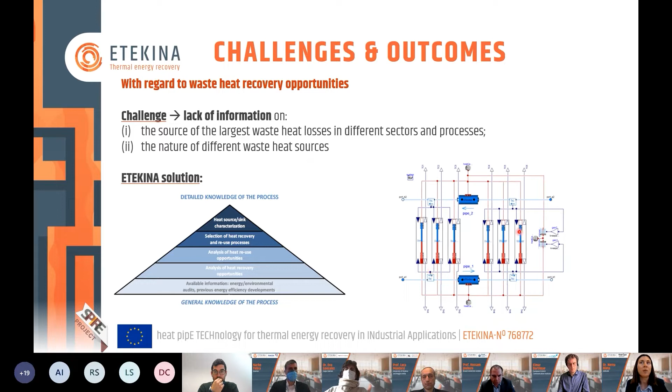Although you can also only see here some black boxes for the furnaces and for the heat pipe-based heat exchanger, there are also specific models behind each of them. So you can see here, for example, the model corresponding to the heat pipe heat exchanger, which was previously designed by Brunel and Econotherm for Fagor Ederlan.

Another challenge related to waste heat recovery opportunities is the lack of demonstration projects. Although technologies for waste heat recovery exist, their operation still needs to be demonstrated in different industrial sectors in order to ensure their wide deployment.

So in ETEKINA, we have demonstrated the feasibility of heat pipe-based heat exchangers for 3 different industrial sectors. And in addition, we have developed a tool for the analysis of the replicability of this technology in other industrial sectors. The tool provides a first approach of the potential savings that could be achieved using heat recovery technologies based on heat pipe heat exchangers at different sectors.

However, it's worth mentioning that in case the results were positive, a posterior detailed engineering design would always be needed before going through the real implementation.

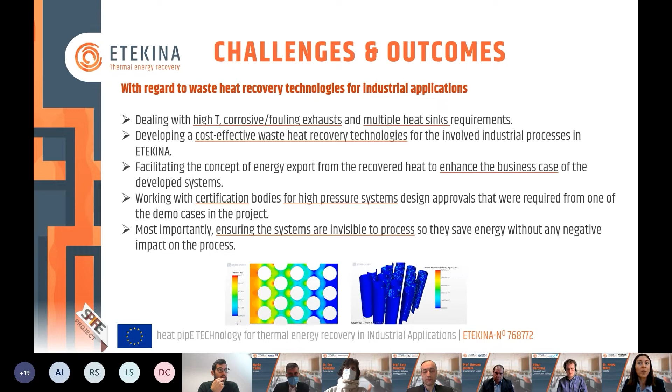Brunel University also developed a methodology for using the waste heat recovery system based on the industry type and the required heat sinks. So to sum up this part, an integrated approach to process innovation has been proposed within the ETEKINA project covering design, simulation, operating conditions, and process management, together with a breakthrough technology for waste heat recovery.

And now I give the floor to Professor Hussam Jouhara.

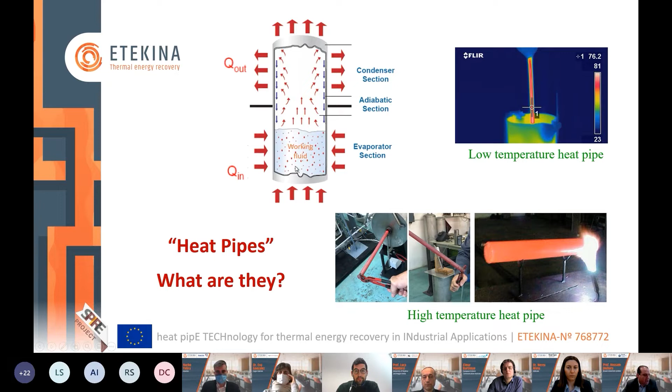What you see here is a sodium heat pipe that can go above 1000 degrees. It all depends on the application and the temperature, and then once that's determined, based on the thermal design, we get the final design approved and manufactured.

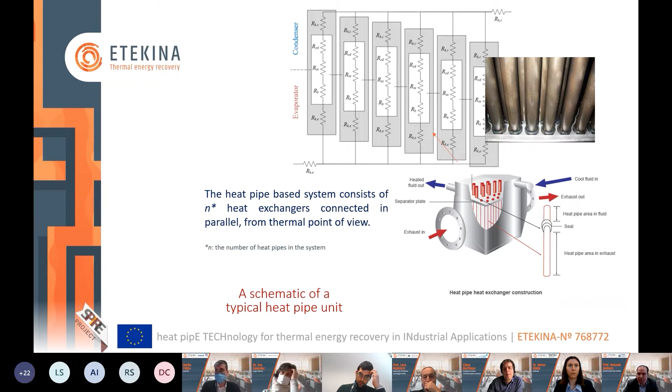From a thermal point of view, the heat pipe heat exchanger, as in this illustration, is a number of heat exchangers linked thermally in parallel. Each heat pipe is a heat exchanger in its own right, linked with the adjacent ones through a parallel link, taking the Ohm's law analogy. This is how the thermal design is developed, and in real life, this is what you see. The configuration here is really based on the thermal design itself.

Each one of us will have at least one heat pipe. If you happen to break your laptop or take it apart, you should see at least one. These are copper heat pipes. They have a wick inside because with laptops they move sometimes against gravity, but it's a heat pipe nevertheless. It transfers heat in a passive manner from the heat source, in this case the CPU or the graphics card, to where space is available so you can absorb the heat.

There are so many advantages of heat pipe technology, hence its application in ETEKINA. Multiple redundancies, as I said before, each heat pipe is a heat exchanger in its own right. So if a number of these heat pipes go out of action for any reason, the remaining heat exchangers will continue operating until the next maintenance cycle. We can also manage the fouling. In ETEKINA, we use CFD to help us in the design, ensuring the particles in the exhaust are suspended as the exhaust goes through the heat exchanger, so we don't clog the system.

For that, we also allowed ease of cleaning in case fouling builds up, so that is something integrated in the design itself. And like you saw before, there are no cold spots in the hot region, which means we don't have cold spots that corrosive elements will condense on, which is a common issue in conventional heat exchangers.

Like I said before, when I showed the sodium heat pipes, based on the design and environment, we designed the system to have compatible materials so they don't interact or get corroded as we proceed with the actual application. The heat pipe itself can have water as a working fluid while receiving heat from exhaust above 1000 degrees.

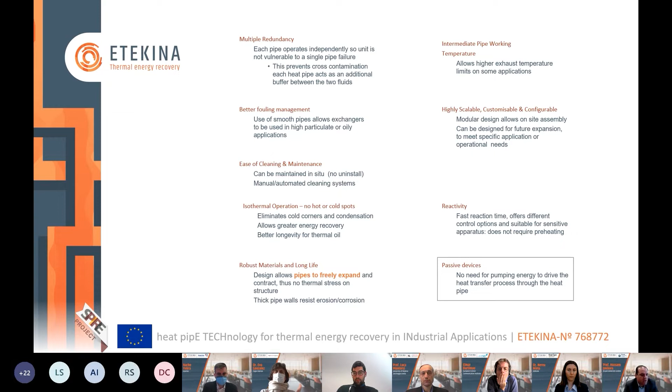We don't need to force a fluid through the heat pipe to transfer heat from the hot source to the cold source. Like you saw in the illustration before, the whole process is done in a passive manner, which gives the heat pipe technology an edge in certain industries.

In the ETEKINA project, what you see here is really an example of a development we have done where we take the case from A to Z. This is an example of an integration where we do everything in a virtual manner before we do the actual installation.

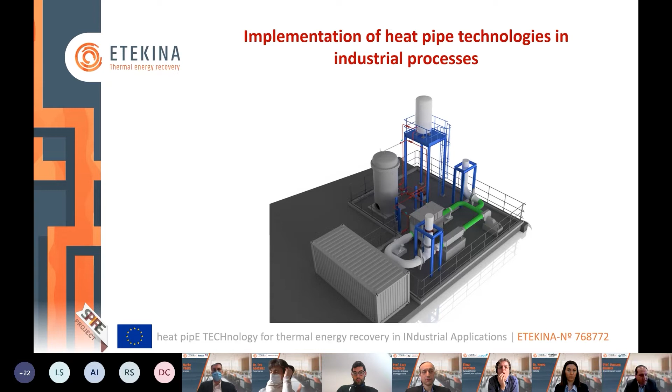The process we followed in ETEKINA started with identification of the actual potential heat recovery in the process. We've done that as a consortium. Once that is done, we define the technical specifications for the implementation. We've gone through energy auditing, installing sensors, and collecting crucial data.

Once that is done, we included everything in something called a data capture form, which included, in addition to the thermal data, the characteristics of the heat sinks and the characteristics of the heat source from a full chemical composition point of view. Once all of that is done, the heat pipe theoretical and mechanical design was conducted.

This was done in close collaboration between Brunel University and Econotherm UK Limited, which manufactured these systems. In parallel, we worked with the demo cases and the RTDs to develop and finalize the P&ID, the piping and instrumentation diagram.

This is a crucial element for any design as it puts together everything required for the demonstration. Once that is done, we know what the installation looks like, and we transform the P&ID into an actual 3D installation. The 3D installation should look 100% the same as that in real life once approved.

So once the demo case is happy with it from a dimensions, locations, and instrumentation point of view, the implementation and commissioning is concluded. The commissioning for all the ETEKINA units was conducted under the supervision of Econotherm and Brunel to ensure the design data was achieved.

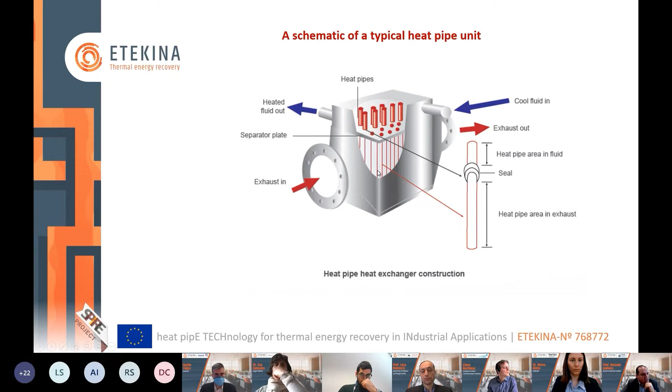Just to give you an idea about the partners who have allowed the demonstration, also partners in the ETEKINA project, without going too much into details since that is coming later: we have three industries in our consortium. The aluminium industry demonstrated in Fagor Ederlan, in very close collaboration with Insertec with regards to oven operation. The concept there is to recover heat to heat air that will be used in the furnace.

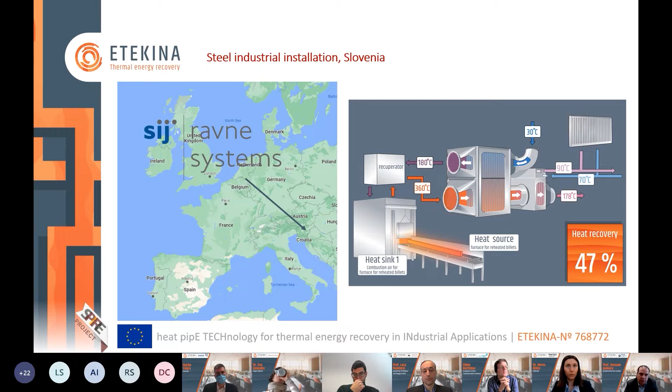The second industry is the steel industry in Slovenia. Our partners there are Ravne, with very close support from the Jozef Stefan Institute. The target there was to do two things: one, to recover the heat for a typical application, gas combustion preheating. In addition, they have potential for energy export to a local district heating network. So the challenge there was really the energy balance between the energy going to preheating the air and that exported beyond the plant itself, and how that balance is done through a very robust control system.

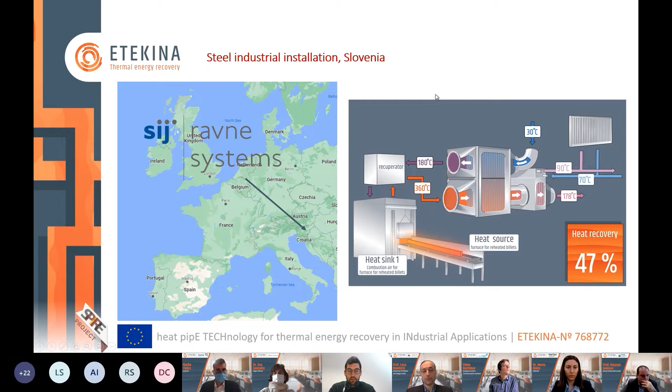So, energy reuse and energy export, quite a challenging design actually, because the temperature of the exhaust can vary sometimes 200 degrees up and down. So that was a very big challenge. We had to work very closely with the partners on the design of the system, and pleased to say that we managed it with various complications that were made possible thanks to the collaboration of the partners in Slovenia. You can see here the air preheater section and the exhaust leaving, going into the water section where the energy is exported.

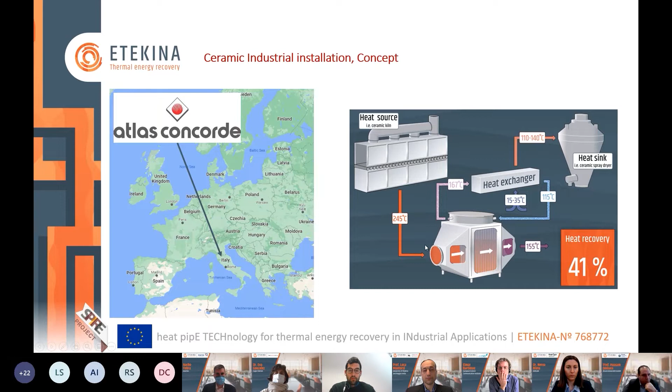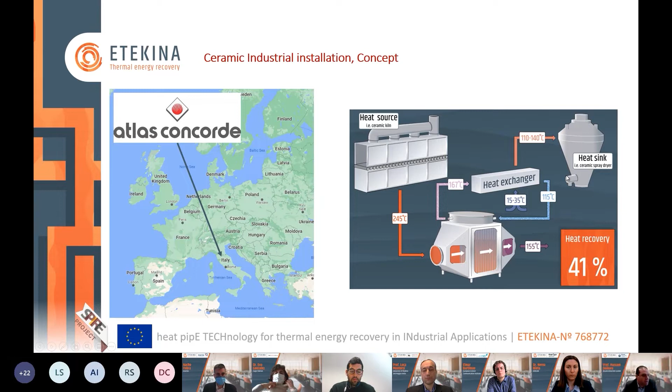The last installation was in the ceramic industry. We've been successful in the ceramic industry before, but this one here has certain challenges, at Atlas Concorde. The challenge here is the high temperature for the water, coupled with quite challenging exhaust conditions that we had to deal with, and large units - we're talking about 700 kilowatt units, and my colleague from Atlas Concorde will expand on that later. The minimum target for our recovery was 41%, and I'm glad to say that we have achieved that nicely. This is the scale of the system during commissioning, and I thank every partner involved in these demo cases on behalf of the consortium. It's been a real pleasure working with all of you on these successful demonstrations, and thank you.

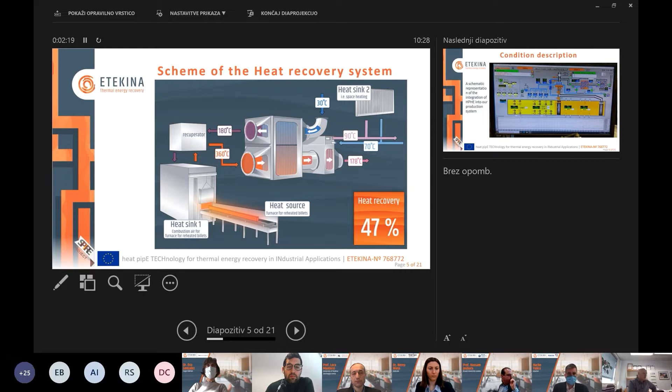Here we can see how we integrated our heat pipe heat exchanger into our production system. This system working in the bypass, and in this solution we can anytime switch off the system without any impact to our furnace.

Our heat pipe heat exchanger has been in operation since the end of October, with stops due to maintenance, testing, and plant production stops. In this period, we produced more than 1,000 megawatt hours, around 60% combustion air and around 40% hot water.

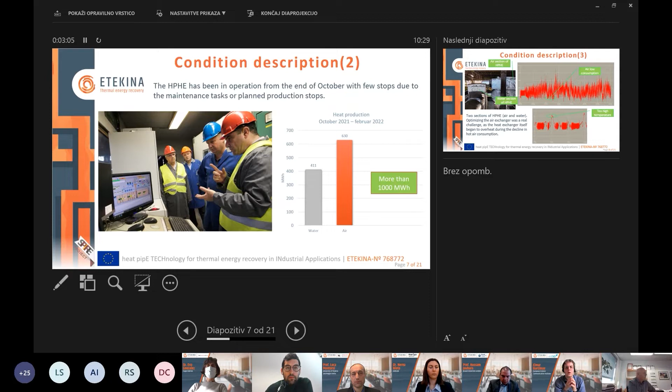Before I talk about the two sections of the heat pipe heat exchanger, we used air and water. We had a very high challenge to optimize the air exchanger, because in a situation with low consumption of combustion air, the temperature in the heat exchanger goes up, and then we have a problem working with our system.

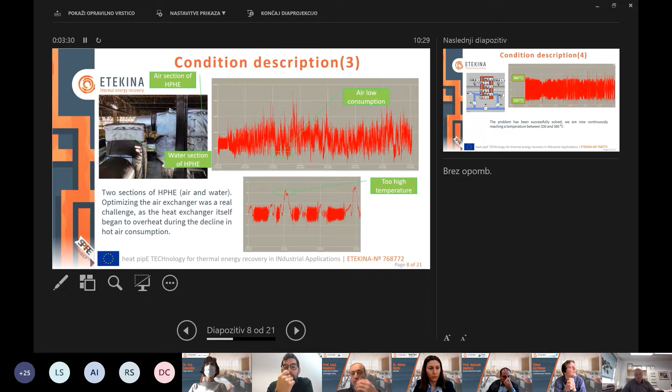This way we made a good solution. We included one flap for mixing the air, and now we continuously reach a temperature between 330 to 360 degrees.

What can it be... Hello, do you hear me? Yes, now. Oh, thank you.

Okay, hello, I am Fouad Al-Mansouri, coming from Jožef Stefan Institute in Slovenia. Now I will present the results of the operation of the heat pipe heat exchanger. I will take the characteristics for one normal working day, from the 6th of January 2022.

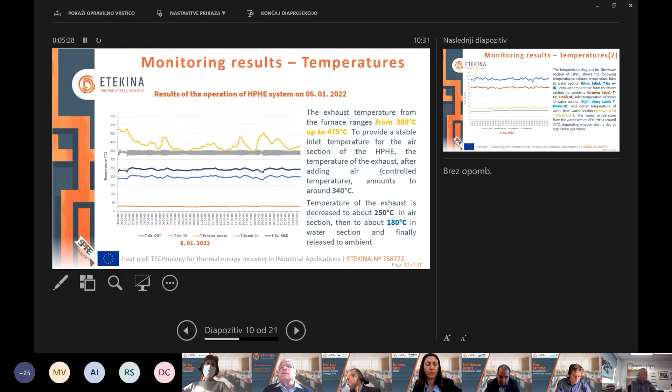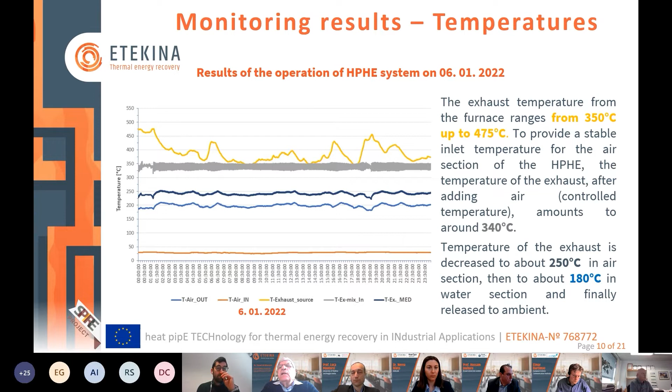Can you see that in the gray line, at about 340 degrees in the diagram? On the other side, the exhaust temperature decreases to about 250 degrees in the air section of the heat pipe exchanger, and also to about 180 degrees in the water section, and finally is released to the ambient.

But this project - now this diagram, can we see the diagram of flow rate of the exhaust? Exhaust from the furnaces, that's in the lower part of the diagram, the gray line, can you see?

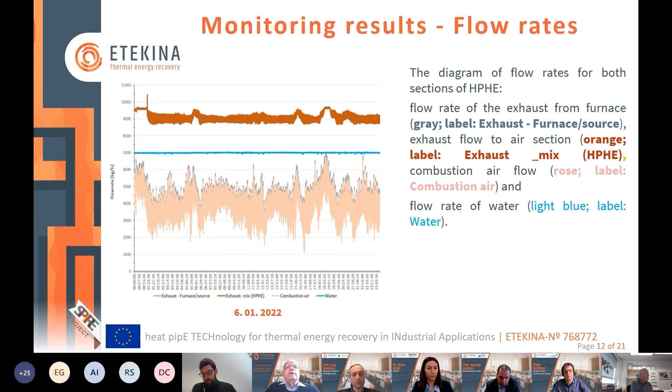Here we have the temperature and corresponding heat recovery power from the water section of the heat pipe exchanger. The units scaled on the diagram below are also aligned in degrees Celsius and kilowatts. Here we can see that the power at the top was about 130 to 137 kilowatts during a working day, and the temperature increased from more than 50 degrees to about 70 degrees when it left the condenser part of the heat pipe exchanger. Next, please.

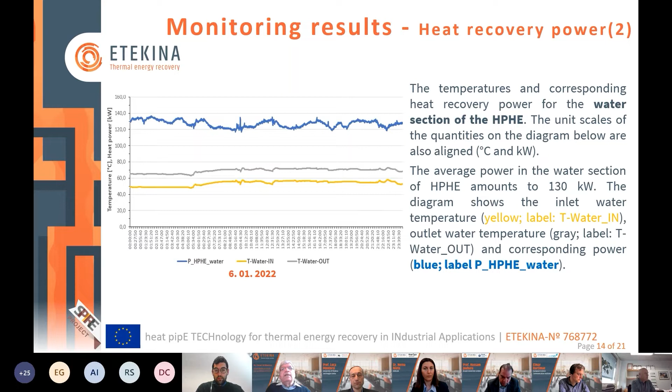Now, about the exhaust power in this reference or first primary stream, we can see in orange or dark orange in the higher diagram, and in the yellow diagram, the total power heat recovery from both sections. We achieve about 330 kilowatt in the heat pipe for both sections. In this time we have about 500 kilowatt.

This is the reference from the furnace exhaust, the power of exhaust potential. The efficiency was more than 60% at this time, but for the whole year it's more than 50%. Between working both sections, the efficiency is higher.

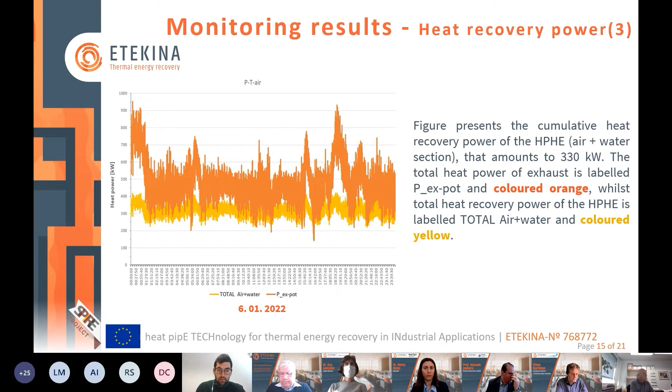Now, with the economic impact and saving, we calculated this for the period from 5 November 2021 to 30 January 2022. This amount is about more than 532 megawatt hour total in both sections, amounting to more than 30,000 euros.

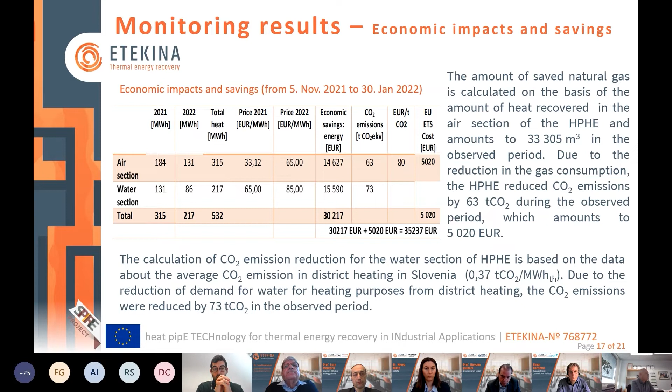Next we have a prediction of yearly heat recovery, calculated also on the average heat saving in the period when really working, previously. What can we see? We achieve more than 2,400 megawatt hour heat recovery for both sections.

This also reduces the consumption of natural gas by about 177,177 cubic meters, which is a reduction of CO2 emission by more than 330 ton CO2. The economic estimation impact here is about 200,000 euros per year. This is, I think, a very efficient economic impact of this system.

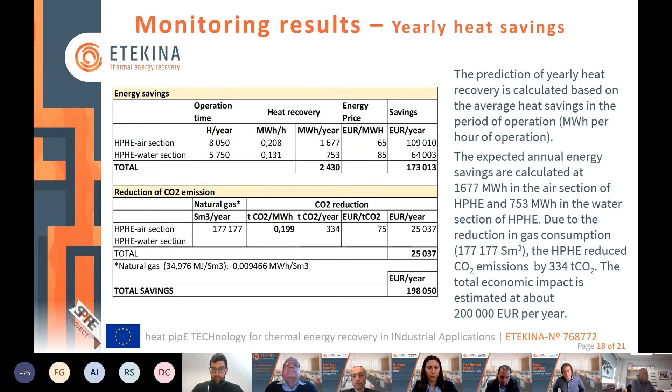The energy saving and economic impacts are even more significant than anticipated. With increasing prices of energy and emission allowances, the economic impact will be even higher.

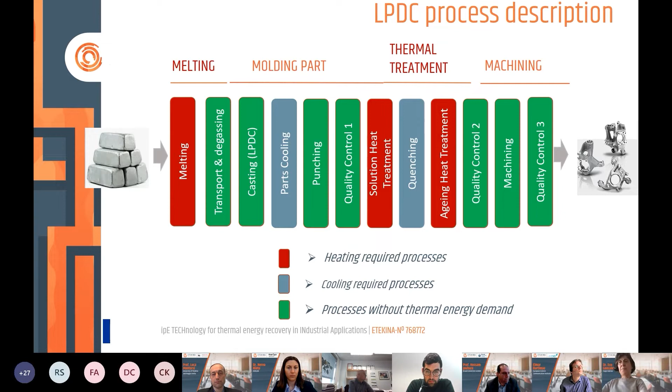So the ETEKINA heat pipe heat exchanger for Ederlan was in the thermal treatment, and the objective was to recuperate energy from the first furnace, the solubilized furnace, which is at 540 degrees centigrade, and use it for the second furnace, the ageing furnace, which is at 165 degrees centigrade.

Here, a picture of the furnace itself. This is important, the operation modes. I will do like this, if you don't mind.

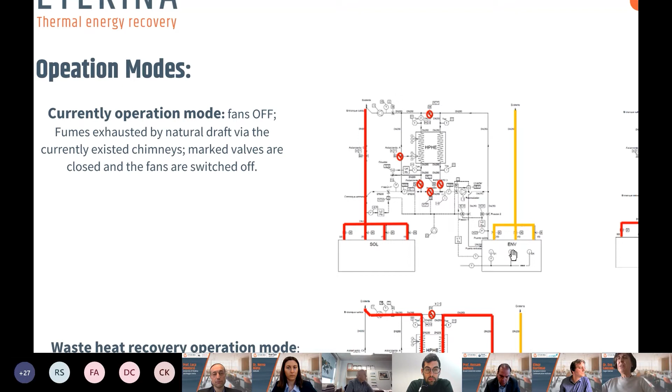This is the mode when the HPHE exchanger is not working, when there was no demo case in this project. This is the first oven with the fumes, where the energy goes out of the process. The second furnace is the same - the fumes with the heat go out.

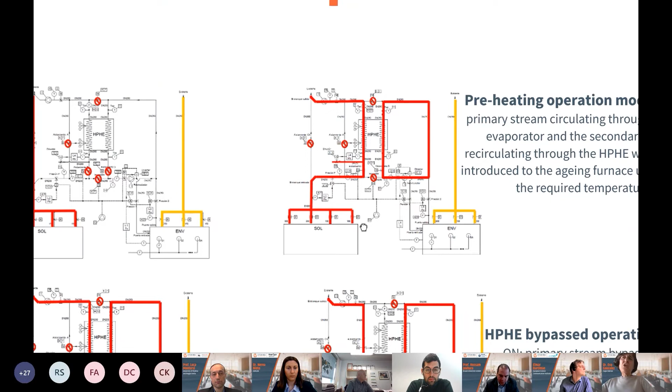This is a mode, a preheating operation, which is not very important - just to mention that there is this mode. The important mode is here.

Here is when it's recovering energy, and how it's working from the first oven. The fumes are collected and go through the HPHE exchanger that keeps this heat, so the fumes go out with another temperature. In the second oven, the fumes go to this HPHE exchanger and capture the heat left there, and go out with higher temperature and go again to the oven.

The last mode of operation is just a functional one, because when we have too much heat in this oven, it's just a bypass in order not to capture more energy for this oven. So the fumes in this case go out without passing through the HPHE exchanger.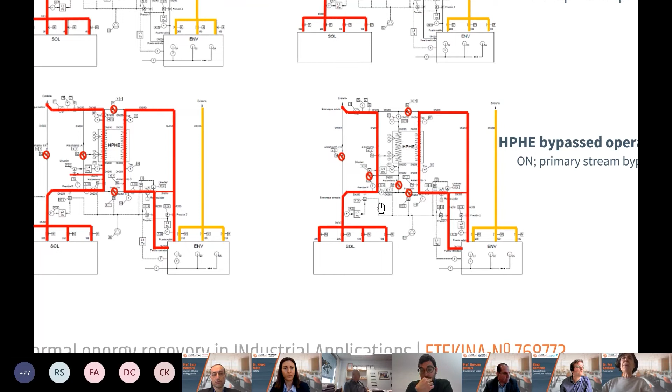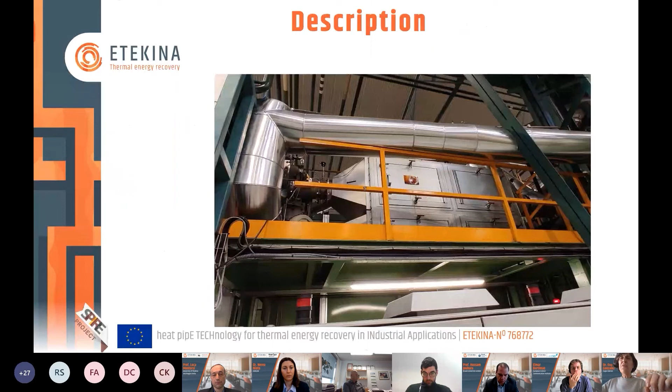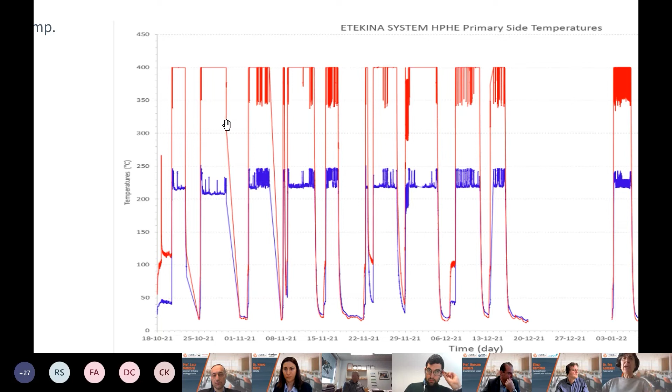We can say that the fumes for the first oven enter the HPHE exchanger at 400 degrees. We had to dilute something because it was too high - the temperature was too high for the HPHE exchanger. So the fumes enter at this temperature and go out at about 220. So this heat is already kept in the system.

If we go to the second furnace, we can see that the fumes go out at about 197 degrees centigrade, a little bit higher than we expected. When they go to the HPHE exchanger, it captures or keeps all the heat, and so the fumes go out from the HPHE exchanger at 300, and that's the fumes that enter again to the second oven.

Here, just the pipes, the water pipes and the oil pipes. Of course, the oil pipes are able to keep more temperature and more heat, and they work constantly - they worked all right during the entire monitoring period.

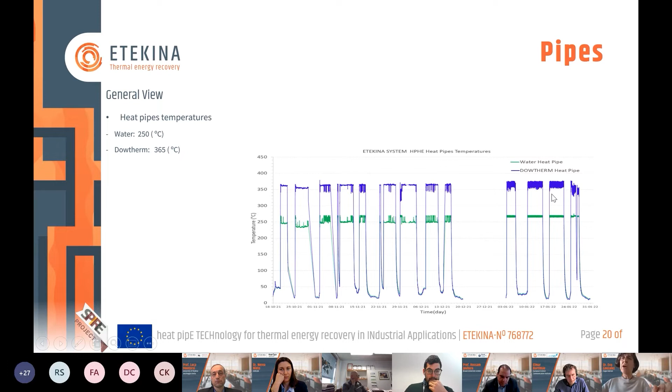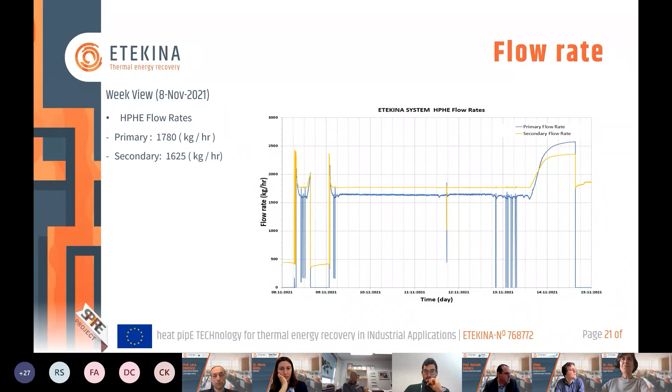The flow rates from the primary and secondary ovens work a little bit differently, but this doesn't interfere with the working of the system. From the primary stream we can say that the heat recovery power was 80 kilowatts, and it was maintained for the entire monitoring period. So the heat efficiency is about 40%, also maintained during the entire period.

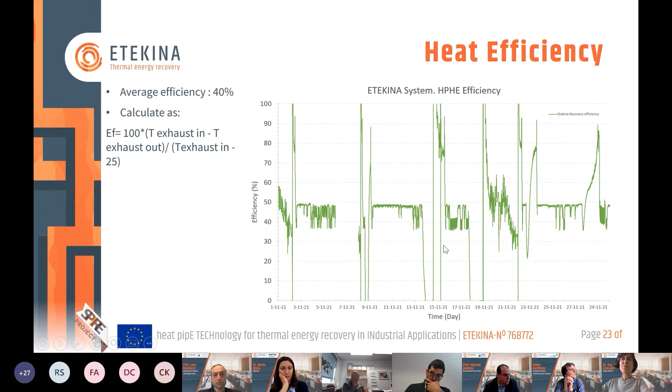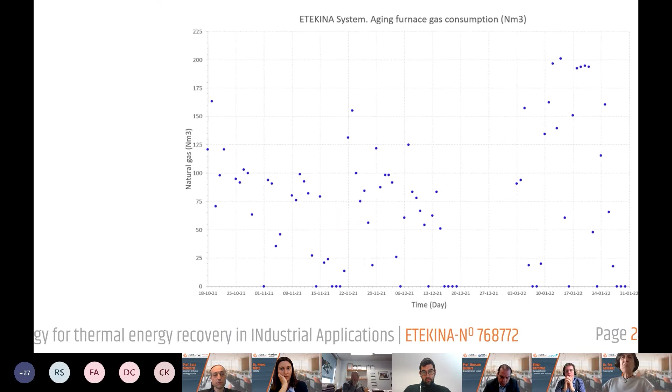Here we also measure the natural gas saved. At the beginning, we measured every day how much natural gas we were consuming. As you can see, there is a lot of variability. This is one of the problems we face because making these trials at the production site, the production is not the same every day, so gas consumption is very related to production. We can see in this period there was no HPHE exchanger, and the gas consumption is a little higher. But because of this variability, in the period when the HPHE exchanger is working, it's not very clearly seen.

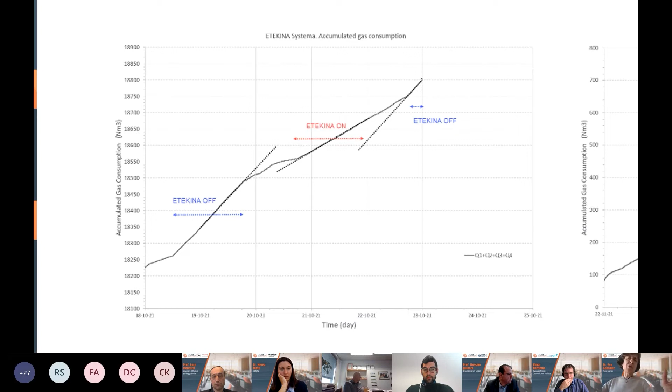So what we did was use another way to measure: the accumulated gas consumption. If you see the first period, when the ETEKINA or the demo case was off, the accumulation curve is much higher than when the ETEKINA is on. When the ETEKINA is on, we can see the curve is less, and it increases again when the ETEKINA is off again. Here in this graphic you can see the same issue: first when the ETEKINA is off, then it changes inclination when the ETEKINA is on.

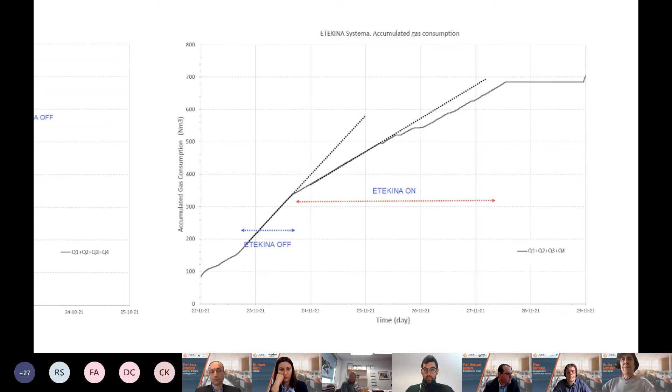And the last point is how to go from a research project to an industrial solution. We've been working on 3 different scenarios. The first is the actual demo already installed in Fagor Ederlan. The second scenario is how an industrial HPHE exchanger would be, because we've learned a lot, but there was something we didn't know at the beginning and wanted to be sure about: we were very worried about not influencing the production or mechanical characteristics of the part. So there were some mistakes in orders — the diverter valve, the fans were a little bit bigger than needed.

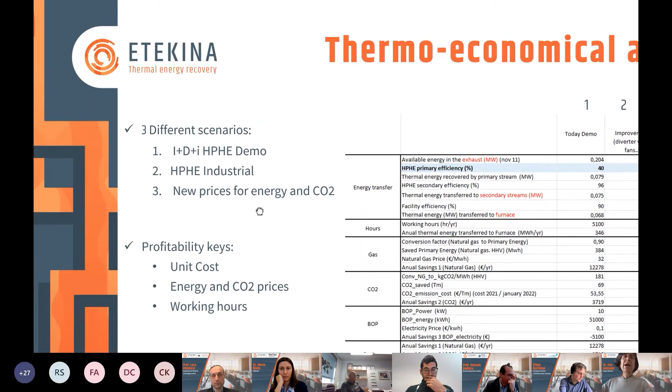And the third scenario is the second scenario plus the energy and CO2 prices of 2022, because from the beginning of the project, or even from last year, the energy prices and CO2 emissions costs are very different. So in this table we can see scenario 1, 2, and 3. Here we have calculated the energy transfer, the hours working, the gas consumed, the CO2, the power needed, the savings, and the return of investment.

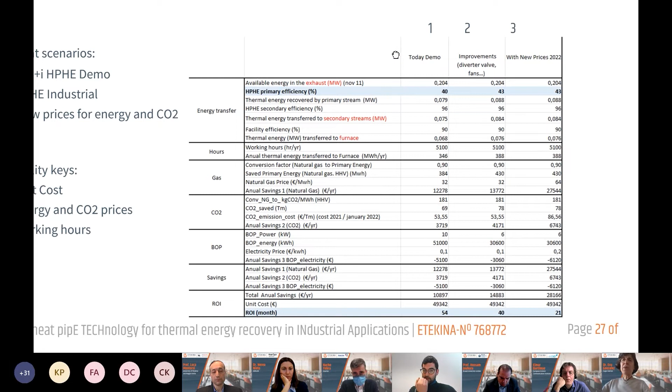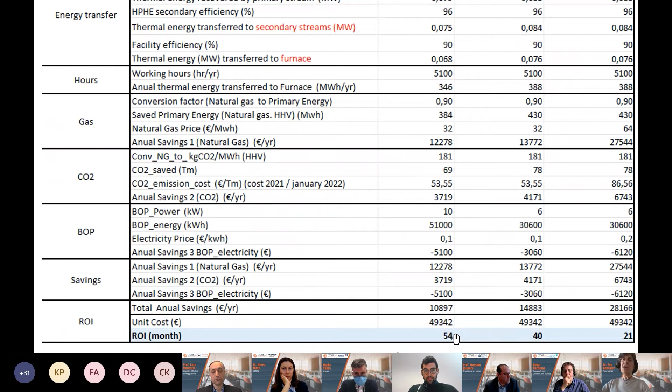In the first scenario today, we have these annual savings, and the return of investment is 54 months. But as we said, if we make an industrial one with all the connections and the system changes a bit, we are sure we can get to 40 — the annual savings will be higher and the return of investment will be less, about 40 months. If we apply the prices in the third case, the actual energy and CO2 emission prices, we see that the return of investment is much lower, below 2 years.

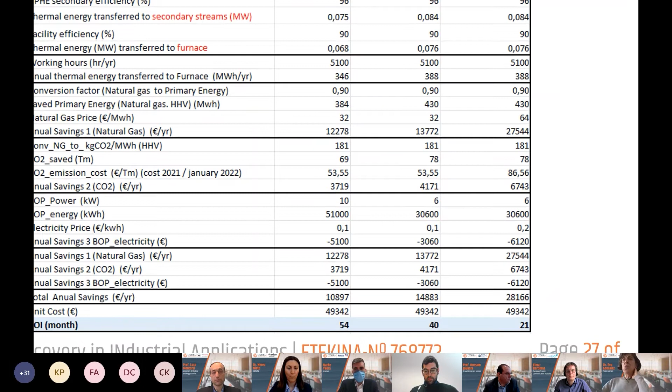This is important because, as I said at the beginning, it was not easy to find an investment for energy savings with a return of investment of less than 2 years. Even 3 years was not easy to find.

And this is all I have to say. Thank you very much. You have my contact email, and also Insertec's, in case you need it, if you have any questions.

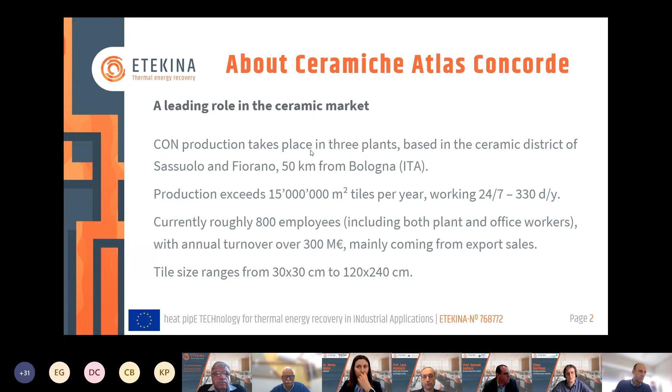Especially when it comes to raw materials and energy. Our tile size ranges from traditional small tiles, 30 by 30, up to over 2 meters long tiles with huge slabs.

Of the 3 plants, we decided to focus this project on the Fiorano plant, which is the main plant in ceramic Atlas Concorde among the 3. In it, we have 2 spray dryers, 7 dryers, 5 kilns, a natural gas cogeneration via an engine of 7 megawatt of electric power output, almost entirely consumed inside the plant. We have more than 250 workers, and production is over 10 million square meters of tiles per year produced nowadays.

What is our role in ETEKINA? Of course, we have the role of demonstrating the benefit of having such a system installed in our place. We were involved in work package 2, the process analysis. We took care of sampling the flows, the temperatures, and so on.

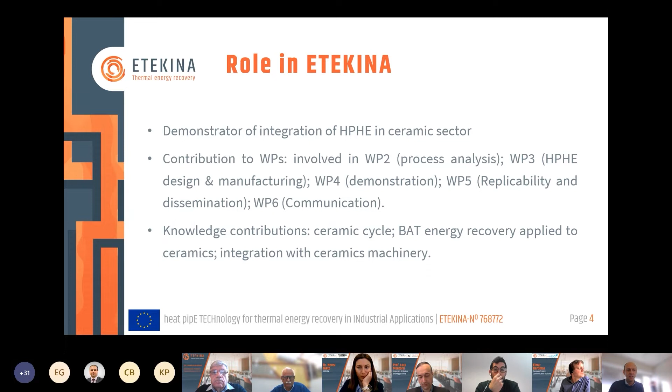Which was our key role? Our key role is about knowledge of the ceramic cycle, and which are the best available technologies applied to ceramics. Also our role is to know how to properly integrate innovative contribution, innovative ideas to the ceramic plant and the ceramic machinery.

So we receive the raw materials, we carry on grinding them in a rotating mill. We get the slip, which is a fluid, a mixture of water and clay, and then we spray dry them and obtain the powder. Then we go on pressing this powder into the shape of the tile, which has to first be dried, taken to almost 0% humidity. Then it has to be decorated and glazed, and then comes the firing section, when the tile itself is cooked and becomes hard.

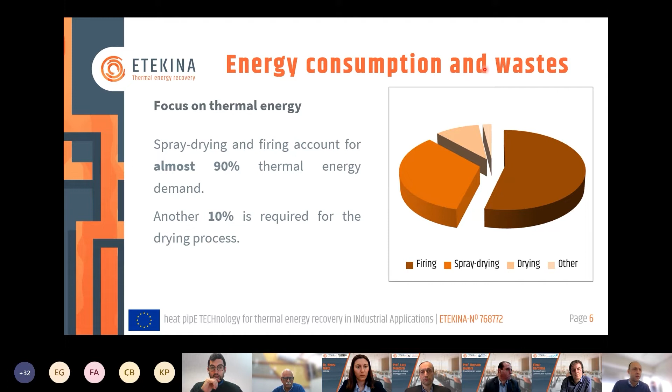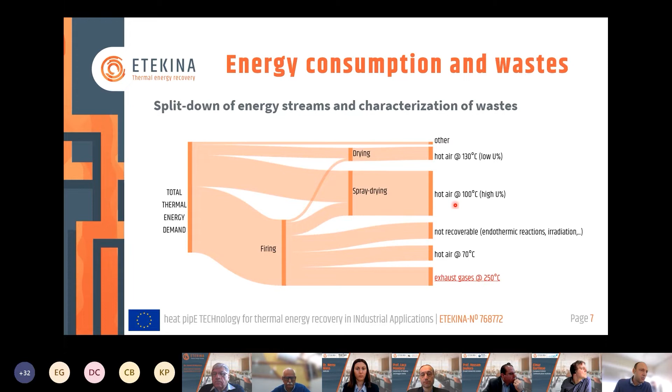So we take the heat from the stream, the exhaust gases of two ceramic kilns. We carry it to the heat exchanger, the heat pipe heat exchanger. On the evaporator side, we've got the exhaust of the kiln. Then we go to the filter. On the secondary side, we've got a closed loop of superheated water, which provides the heat to a fin coil heat exchanger, which itself warms up air to be fed to the spray dryer.

The spray dryer is the machinery, you remember, at the beginning of our process, which dries up the slip, and which works at 500, 600 degrees. So it's a relevant saving for the spray dryer to receive the same air, not at 15 or 30 degrees in summer conditions, but at 120, 140 degrees.

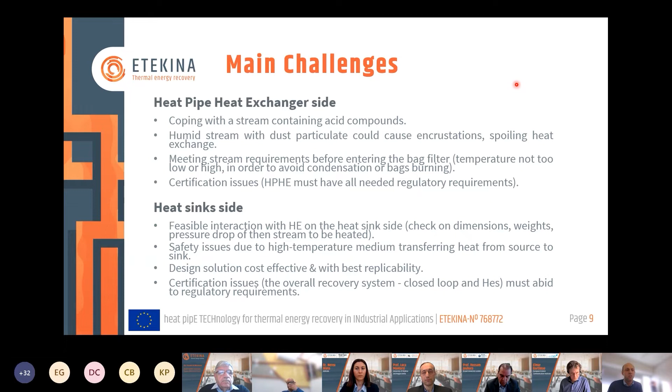During the first year of the project, we mainly focused on identifying the correct, most suitable heat source among the kilns in the plant and the most suitable heat sink. In the second year, we focused on design of the system and the suitable heat medium, which at last was identified as water. In the third and fourth year, the executive phase of the project took place — we started with integration and then the demonstration, which is going on right now.

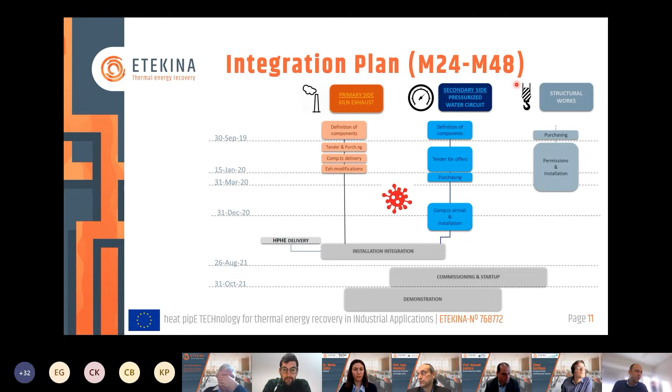Of course, we have some expectation on this project now that it's working. And the main one comes from containing energy bill, especially due to the fact that nowadays energy market figures are really terrible, both for natural gas and for CO2, which are the two main savings that we are going to obtain via ETEKINA.

We expect to recover 41% of kiln exhaust sensible heat and reach almost 4,000 megawatt hour of natural gas savings, and over 800 tons of CO2, and consequently, a relevant natural gas consumption reduction on the spray dryer.

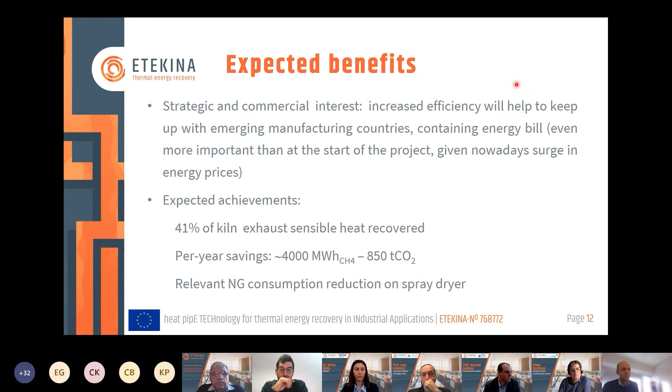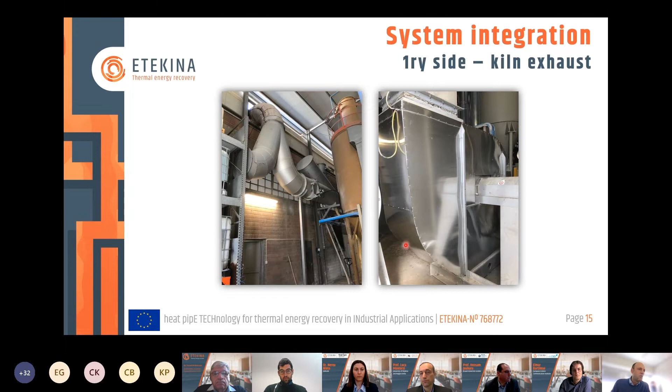We had to operate on the kiln piping. The original piping, which was going straightly to the filter, had to be modified in order to accommodate the bypass, which goes to the heat exchanger, positioned here, and then goes back to the original piping. We had to modify the fan to install the superheated water pipeline running both on the outside and on the inside of the plant.

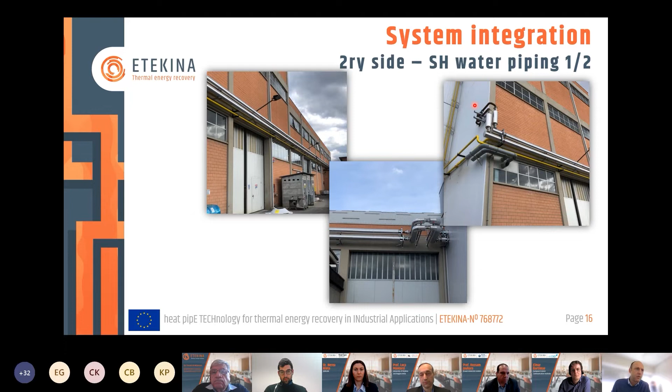Here you see a detail of an expansion omega with expansion joints, more expansion joints in another curve of the piping, here inside the factory, a curve to the heat sink.

Here you see a portion of the spray dryer, which is very tall, almost 20 meters tall. And here you've got the air intake, which is going to be preheated via this fin coil heat exchanger. Here you see the piping, the superheated water piping going in and out of the heat exchanger.

As for electric system and control panel, we had to provide also all the controls and logic to control temperatures, the bypass of the system, and the three-way valve in order to properly operate the water loop.

As for the marking of the unit, a lot of documents had to be provided. The unit had to undergo a lot of approvals and certificates in order to meet all the requirements we needed here in Italy. It had to be approved by Lloyds, a third party who took care of approving the unit as a PED category 4. It also had a CE marking and the declaration going with it. Then there were other documents to be provided on the Italian side, which we took care of.

A brief representation of temperatures and power over one week of operation. Here you can see the temperature of the streams, just seeing the moments when the spray dryer was working. The temperature in this week would vary from 250 degrees at the inlet of the unit to 280 degrees, and the bypass valve was almost always shut down, same as the three-way valve.

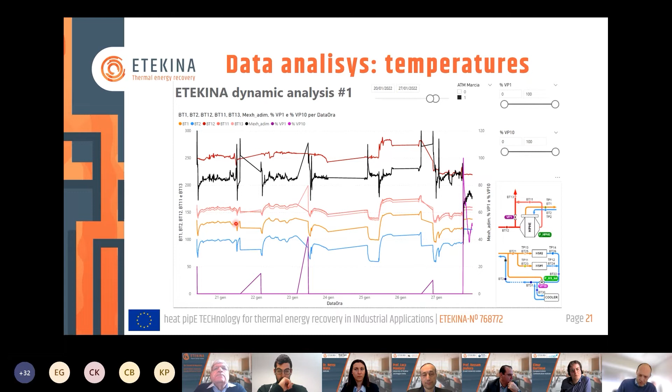As a consequence, we reached a power recovered of almost varying from 600 to 700 kilowatts. And this was what we expected the unit to deliver, also in terms of energy saving.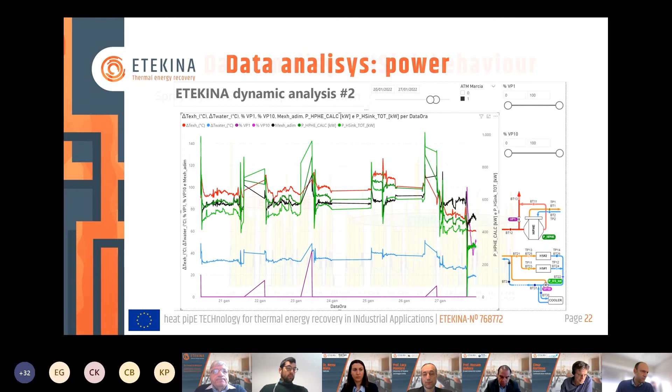You can see the proof here on the spray dryer consumption. Here you can see the first days of January, when the system was shut down because the kilns were not operating. And then the same spray dryer when the system was operating. So you see the shift in energy consumption.

As a conclusion, we could say that yes, the system design and the knowledge of normative, regulatory and asset issues allowed us to realize an innovative heat recovery. Innovative because it comes from a heat source which is usually discarded to atmosphere, at least here in Italy. We consider it an important energy stream and an important solution.

The natural gas saving is one-to-one with the power measured in the unit. So for 1 kilowatt that we are saving, measured on the water side, we are saving 1 kilowatt of natural gas in the spray dryer.

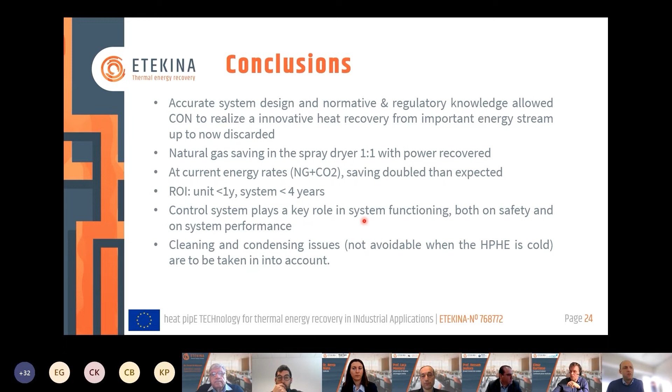And last, when dealing with the stream from the kilns and with this kind of stream, the condensing issues and the cleaning issues are to be taken into account. The condensing issues are not avoidable when the unit is cold at the beginning, so it is something that has to be taken care of when designing the unit with the proper materials, how Brunel and Concorde did.

That's all from my side.

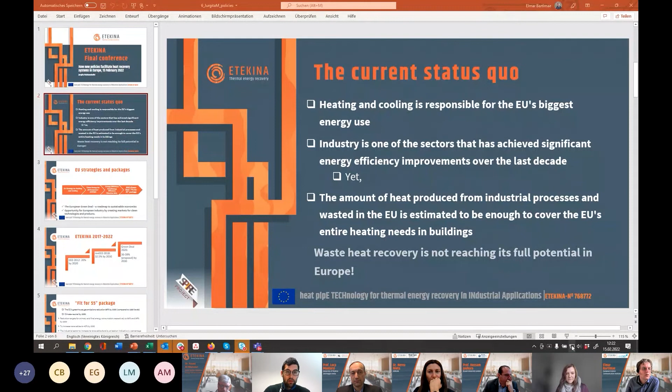Let's talk about EU strategies and packages. The first one is the EU strategy on heating and cooling. In 2016, the Commission launched this strategy, nearly 6 years ago, as it was launched on 16th of February 2016. The Commission looked at plans to boost the energy efficiency of buildings, improve linkage between electricity systems and district heating systems, and also increase the use of renewable energy and encourage reuse of waste heat generated by industry.

That was the very first time the Commission looked properly at the European level, because before that, all the heating and cooling was more to do with national policies. So national member states had it in their own policies to do something at this point.

Now moving to the legislative point of view. Strategies are good, they drive and show the future, but we need more measures, more compulsory measures from the member states. So what the Commission published is the so-called Clean Energy for All Europeans package. In this package we looked at the directives, we revised the directives, and the Energy Efficiency Directive is the most relevant for our project, so we looked at it most.

Thank you. Next slide, I think it just says thank you and my email. I added a few publications as well, more from the regulatory side, more from national policies in Slovenia, Spain, the UK and Italy. Thank you.

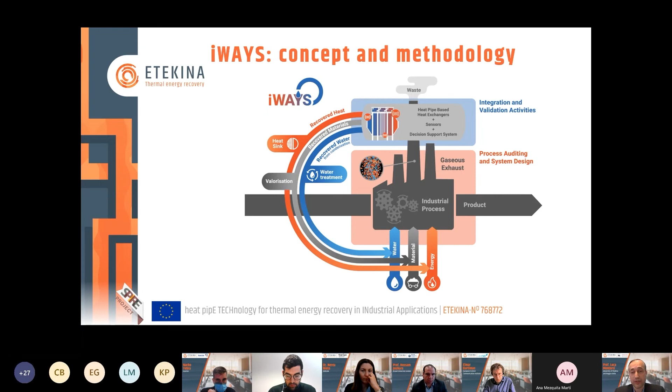So what's new in this approach? Indeed, there are a lot of new technologies, because the heat pipe heat exchanger has to face a corrosive environment, so it must stand corrosive acids or other substances that might be present in the exhaust gases.

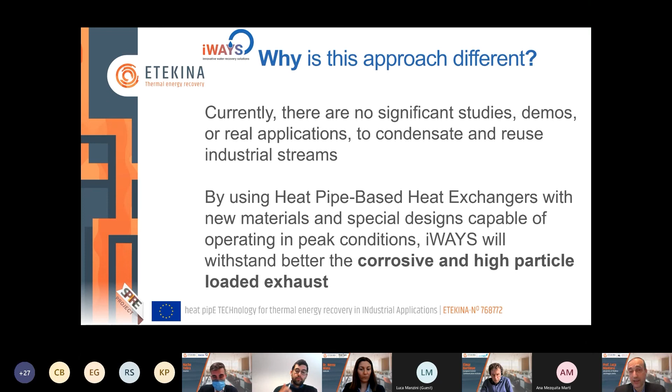Also, particulate load will be an issue, and we need to recover both water and material and use them back in the industrial process we are addressing. Or, in some cases, if what we are recovering is indeed a product for this industry, it will be a commodity that can be sold by the industry itself.

These are the numbers of iWAYS. We are 19 partners from 9 countries. We have 3 demo cases, 4 technology providers, and the project will last 48 months. Indeed, 1 year already went through, so we are in the second year of this project.

These are the partners of the consortium. I'm sure that you can recognize some of them. Some of them are also in the ETEKINA project.

These are the specific objectives of the iWAYS project. Just to mention a few figures, we are aiming at reducing by 30% the freshwater consumption of the industrial process we are addressing. We are going to recover 20% of the heat from the exhaust stream for that industrial process, and the payback period is also an important topic for iWAYS, as well as for ETEKINA, and we are aiming at a payback period lower than 5 years.

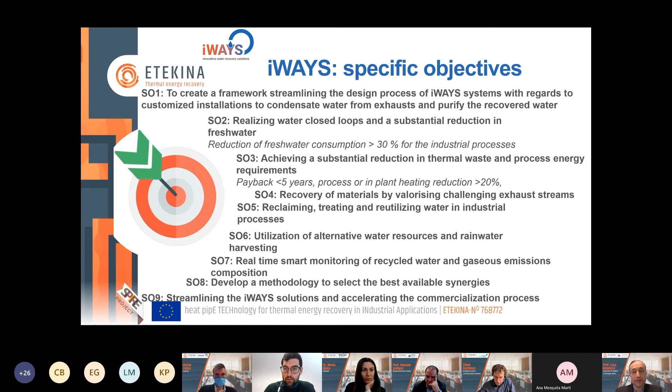Indeed, we have also other specific objectives, because we are going to implement a monitoring system in order to increase the control and monitoring capabilities of the industrial process. And we are also going to develop the DSS tool for the evaluation of possible alternatives to fresh water for the industrial process.

These are the technology components for the iWAYS project. We know very well the heat pipe based heat exchanger, but as I said, we are aiming at condensing the water content of the gaseous stream, so it will be a heat pipe condensing economizer, because we are indeed condensing water and eventually other substances in the gaseous streams.

We are going to develop a decision support system based on sensors and control systems that will be implemented in the demo cases. And water treatment will be another important topic for the iWAYS project, because the condensate will be treated and purified to the level required for the industrial process, so that we can reuse the condensate in the industrial process itself.

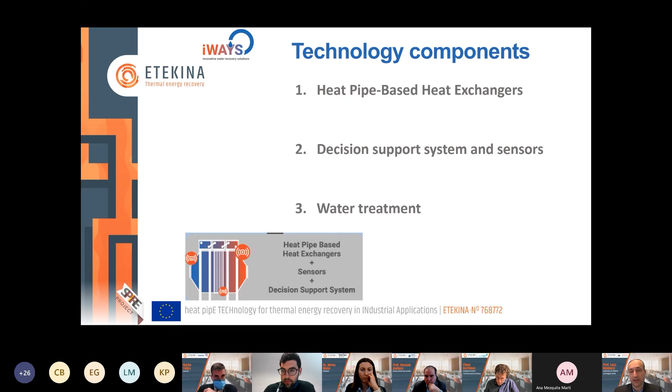A very quick description of these technologies. This is the heat pipe heat exchanger. I'm not going into the details about it, as we heard about the functioning of this technology. The step forward for the iWAYS project will be decreasing the temperature of the exhaust gases below the dew point of the water content, but eventually also of sulfuric acids or other acids that might be in the exhaust stream.

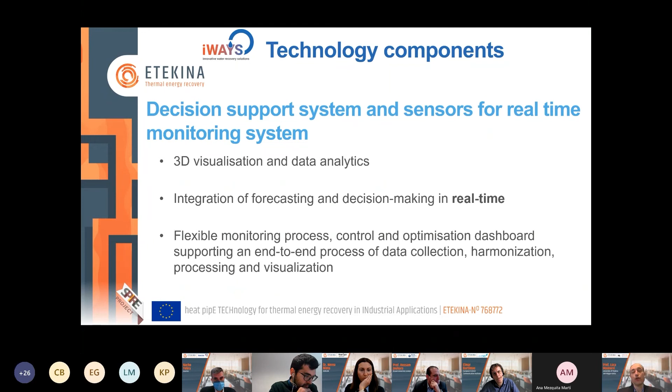The decision support system will be another technology developed within the iWAYS project: a 3D visualization and data analytics, integration and forecasting and decision making in real time, and a flexible monitoring process, control and optimization dashboard supporting an end-to-end process of data collection, harmonization, processing and visualization.

Then water treatments. Indeed, we are working on different water treatments. We have different demo cases, we have different industries within the project. In a minute, I will show the demo cases. So the requirements of the water treatment will be different from demo case to demo case. We are involving different water treatments, some of them with a quite low TRL.

Such as the photocatalytic nanofiltration system that will be developed within the iWAYS project, but we are also using membrane distillation, ultrafiltration, reverse osmosis, evaporation and crystallization treatment. These treatments have a higher TRL, but they will be implemented in an industrial sector where currently they are not used. So iWAYS will be a possibility to discover new implementation, new applications for these water treatments.

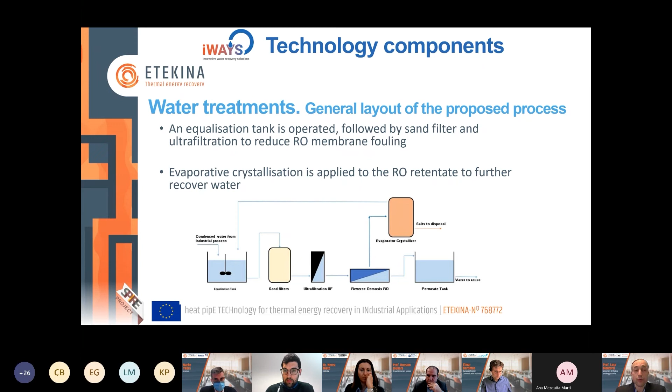Now I'm spending a few words about the demo cases. We have three industrial sectors: ceramic, chemical, and steel sectors will be involved in the iWAYS project.

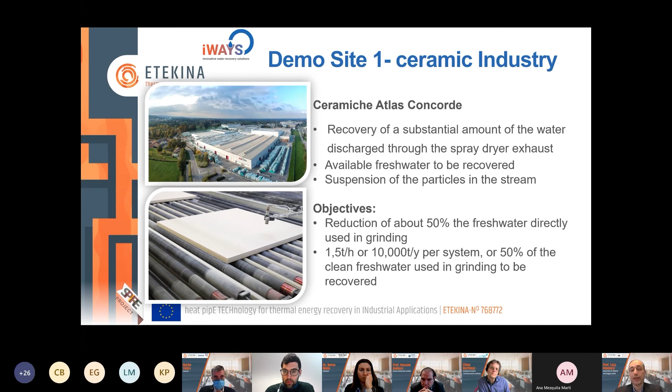The ceramic industry in the project is Atlas Concorde, so we know them very well, and we are going to implement the iWAYS technology in one of their facilities.

The chemical industry is Aluflor AB in Sweden, and they are producing aluminium fluoride. That means their exhaust stream is extremely corrosive, with acid in it, and this is a very challenging demo case in terms of corrosion resistance for the heat pipe condensing economizer, and also for the water treatment system that should separate the acid content from the water content. So the first one can be sold as a commodity for the industry, and the water can be recycled back into the industrial process.

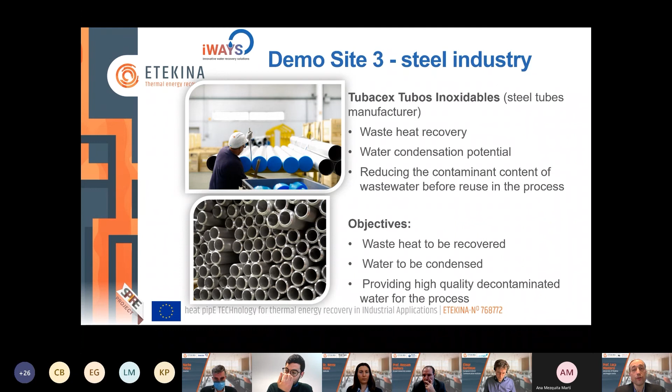The third demo site is the steel industry, Tubacex. They are producing steel tubes, and we are going to address the cooling process for the hot tubes. So we are going to recover heat and water from this process, and the heat will be used in the water treatment system in order to enhance the overall water treatment system of the industry.